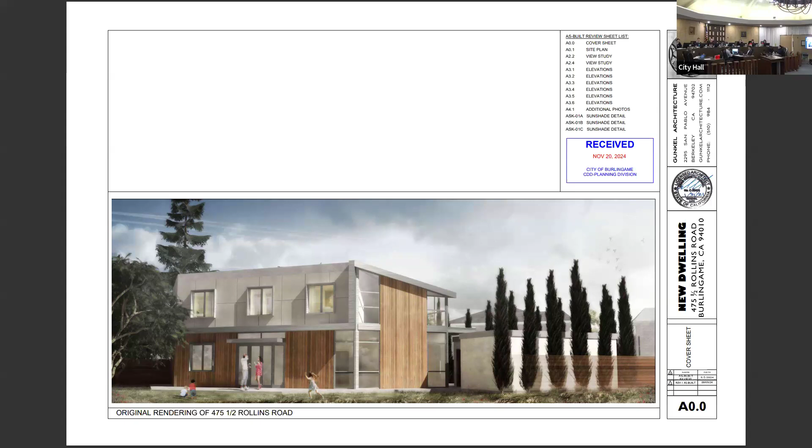Okay, I'm going to open the public hearing. Will the applicant please come forward and state your name and anything else you'd like to add about your project? Yes, my name's Brad Gunkel with Gunkel Architecture. Can you hear me? I'm joining via Zoom. Yes, we hear you.

Okay, perfect. I'm going to share my screen. Or I guess I'm sending... I'm sorry, we don't allow applicants to share screen. Well, I guess you guys all have the presentation, so I'll just kind of walk you through it. I think probably the most important pages start at A3.1.

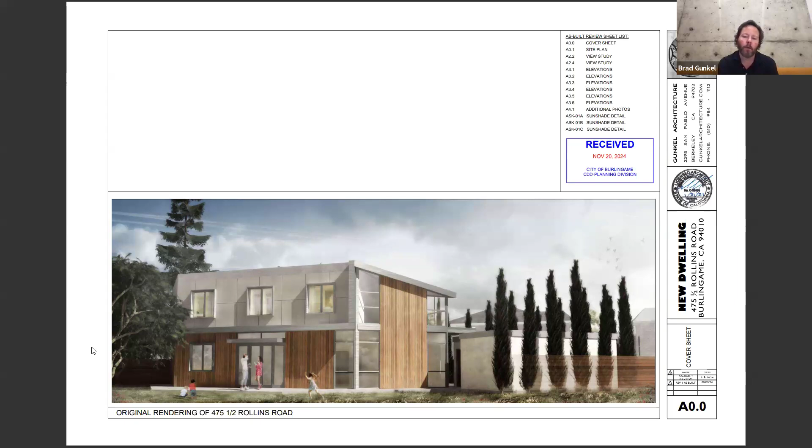So on each one of the A3 pages, we have 4 images. The image on the bottom left is the original approved design. The images above, on the left and right, are basically the as-built condition that you had previously seen—the one on the left being a rendering, and the one on the right being a photograph. Then at the bottom right of each page is the proposed revision to the as-built conditions, in order to

basically comply with the design intent of the original design. So by that, it's not always necessarily exactly the original design. In some cases, it's modifications to the original design, but done in a way that we feel still meets the design intent. So what you can see on A3.1 is that we are adding fins, basically projecting fins around the top 3 windows of the second floor. This is on the southwest elevation, probably the most visible elevation of the house from surrounding yards.

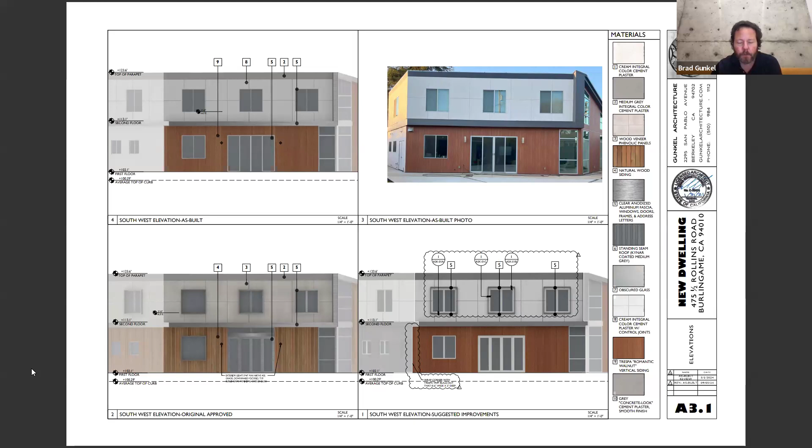Well, I think on A3.2, you can see the same condition happening on the ground floor on the bottom right image as well. And there again, we're wrapping that Trespa around 6 inches and having it project out 2 inches. Then on A3.3, the elevations are completely in compliance with the original approved design. And A3.4, I think you're going to see—

this is where the building—the house was built without the Trespa or faux wood siding on a couple of the elevations, and the doors and windows were white instead of gray. So what we're proposing is actually putting another coat of the integral color cement plaster over the white cement plaster on the lower level. This would be a gray integral color cement plaster to provide a sort of concrete look.

We feel that, combined with painting all of the white doors and windows metallic gray, and then continuing that Trespa around so that you actually see the profile of the wall projecting to terminate the cementitious plaster, will create a nice finish appearance that I think you guys were looking for. It wasn't necessarily reflected in what had been built.

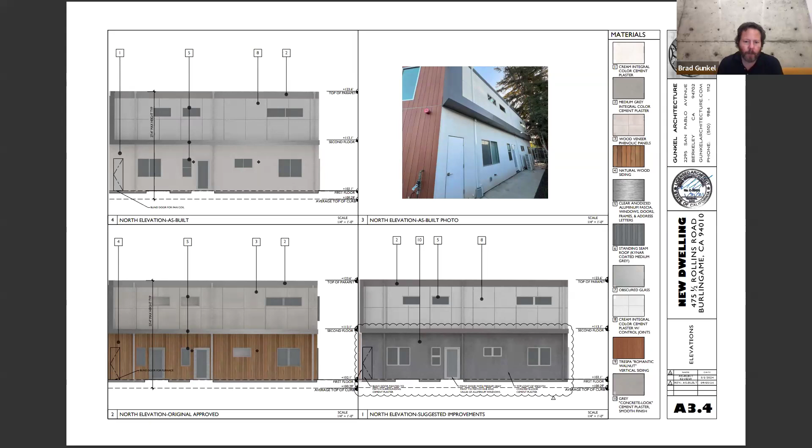And so again, on A3.5, I think the best way to compare this would be to look at image 3 as the as-built condition, and image 1 below that as what we're proposing—so you can see the difference between the two. We are proposing the fins on the 3 southwest windows on the top floor, not the window on the northwest elevation, as that window is mostly covered by trees and pretty much invisible to the neighbors.

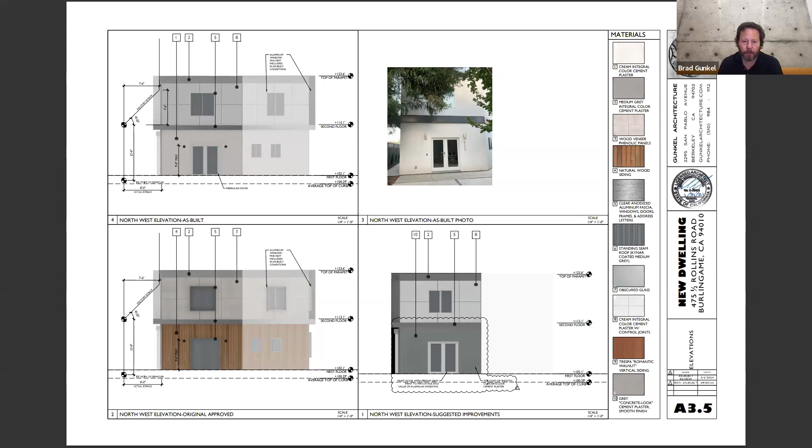We thought it would be wasted to put the trim there, and also that the trim would just end up collecting debris from the adjacent redwood tree. A3.6 shows how we're wrapping that trespa on the lower level, having it project out so it becomes a termination point for the cementitious plaster, using a natural gray cementitious plaster that creates a concrete look on that lower level.

The last three images are the details for the projecting fin around those three upper floor southwest windows, creating a fin offset from the window by 2 inches that provides visible stucco between it and the trim on top and sides. On the bottom, we believe you won't be able to see the flange attached above the trim, similar to the top.

I think that's reflected in the elevations you'd previously seen. So that all said, if anyone has any questions, I'm happy to answer them. Thank you for your time.

Thank you very much. Any questions for the applicant?

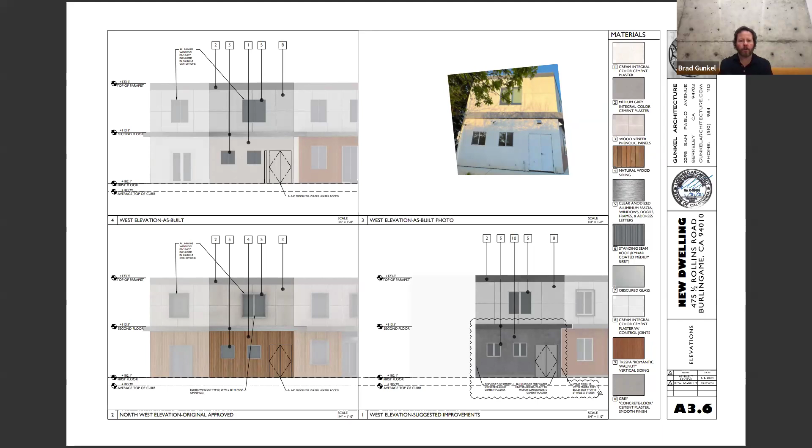Okay, thank you. Do we have any other questions for the applicant? Do we have any members of the public attending in person who wish to speak on this item, or did we receive any public comment emails? No public comment emails.

Then I'm going to close the public hearing. Commissioners, do we have any comments or motions?

Yeah, when this came before us originally we spent a lot of time talking about it, so I think the changes made reflect the minutes we had from that meeting. I do like the fins, they add a little bit of depth on the second floor. I understand maybe the maintenance issue on that side window - I was going to say why not add that fourth window, but I don't think it's visible, and if it's a maintenance issue it's not critical for me. I think the smooth stucco in a concrete color probably solves the ground floor issue we had. So I'm okay with the changes as proposed.

I'm in agreement with Commissioner Horan and feel the changes were a good add. I appreciate the team taking the extra steps to push that through, and I think it'll make a better product.

Commissioner Pfaff? Oh, I was just going to answer Commissioner Pfaff's question. Just scaling the fins off the drawings, they look like they're about 4 inches originally proposed. Okay, yeah, thank you, I appreciate that scale.

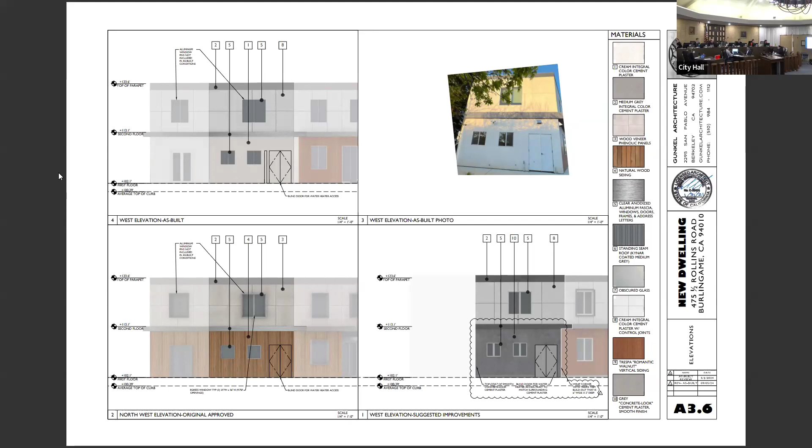Commissioner Comaroto, aye. Commissioner Pfaff, aye. Commissioner Schmid, aye. Commissioner Shores, aye. Commissioner Tse, aye. Vice Chair Horan, aye. And Chair Lowenthal, aye. The motion passes.

Moving on to item 9B, 1317 Paloma Avenue.

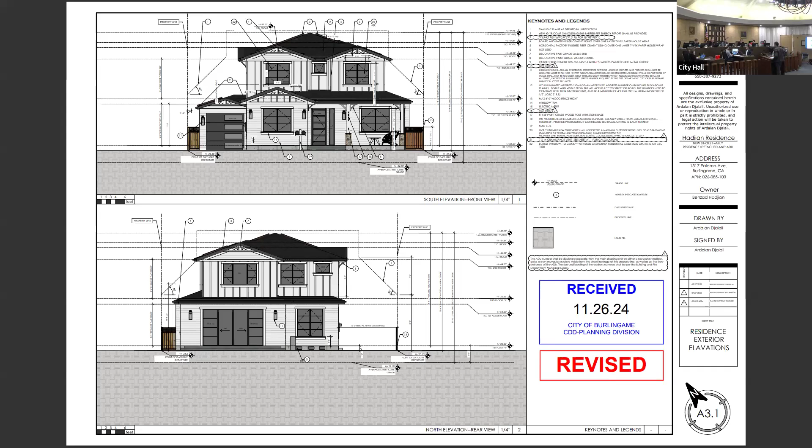Regarding the decorative window shutter, we decided to eliminate those from the facade because it can bring more harmony to the design and more balance. And the last change will be removing the light stone from the false chimney on the side yard, so there is no clear view from the street to the side yard and also the false chimney from the lower roof. The appearance will not be good from the inside of the house.

So this is pretty much it for the recent changes. If you have any questions, I will be happy to answer those. And one more thing, there is still a request from the clients: if we can remove the decorative trusses from the front of the garage and also from the rear elevation, and keep the rest of those. Thank you.

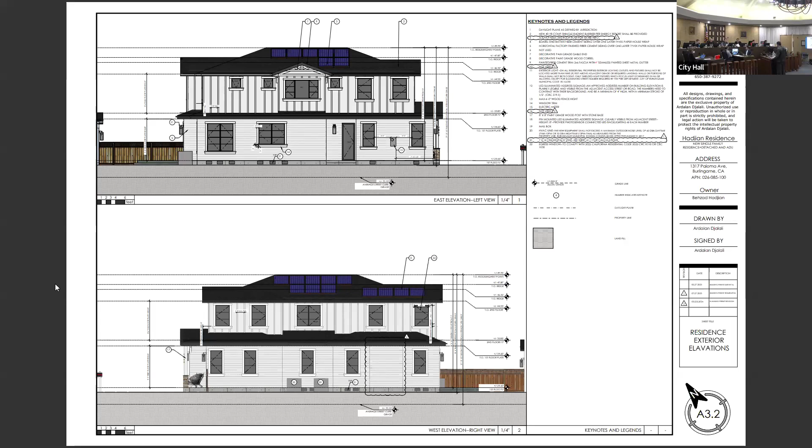Do we have any questions for the applicant? Commissioner Tse?

You were just saying removing the truss at the front of the garage, under the gable there, and then at the rear elevation, above the master bedroom. I'm trying to recall correctly, last time I was visiting there, was there something in the area of under that gable end at the garage that's preventing you from adding that truss?

Because of the complexity of the work, there is some cable work for the camera, and the client asked if we can remove that.

Well, yeah, that's what I seem to recall, that there was a camera there or something. Right in the middle? I can't remember if it was right in the middle or on the side. Was it right in the middle? Yes, in the middle. Okay, thank you.

Any other questions for the applicant? So just to be clear, what is on the screen here is what they are proposing, but they've asked to remove the garage truss. Sure, yeah. Otherwise you can keep those up.

Do we have any members of the public attending in person who wish to speak on this item, or did we receive any public comment emails? No public comment emails. All right, thank you very much. I'm going to close the public hearing.

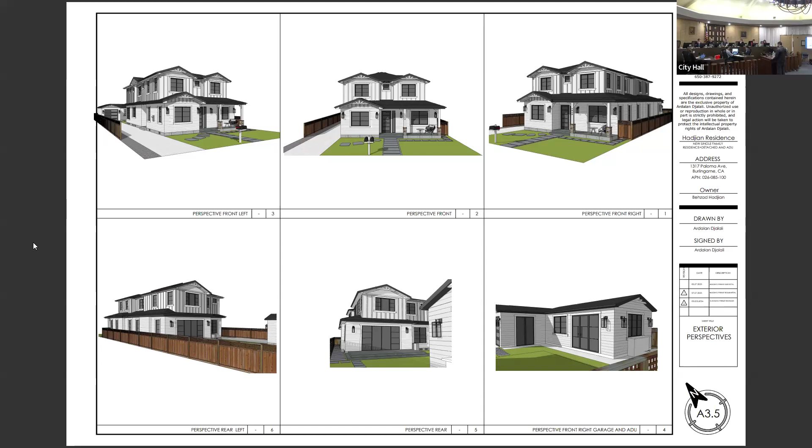Commissioners, do we have any comments or motions? Again, I think we discussed this project at length. I appreciate that this is where we landed. I'm okay with removing the truss from the garage and the rear elevation. I'm okay with the changes as proposed. I'm also okay with them mentioning removing the shutters, which had been discussed before. I'm also okay with those.

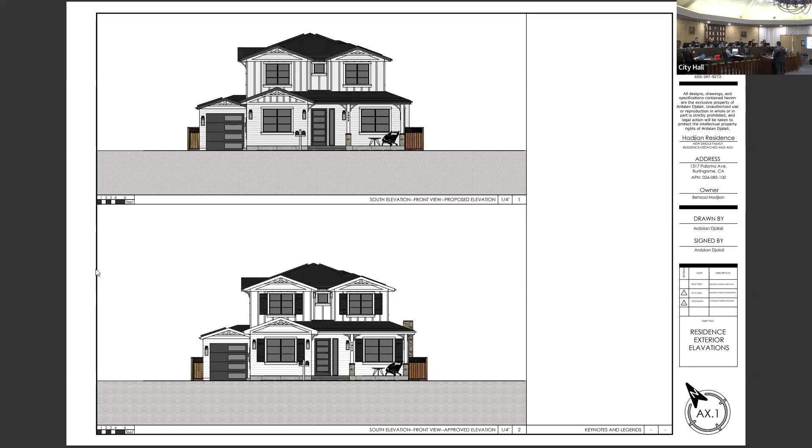Agreed. Anybody else? I'm good. I can move that we approve this project as revised per the staff report, less the trusses on the front of the garage and the rear elevation. I'll second that. Great, we have a motion by Commissioner Tse, seconded by Commissioner Horan.

Any discussion? We have a roll call vote, please. Commissioner Pfaff, aye. Commissioner Schmid, aye. Commissioner Shores, aye. Commissioner Tse, aye. Vice Chair Horan, aye. And Chair Lowenthal, aye. That motion passed 6-0-0-1.

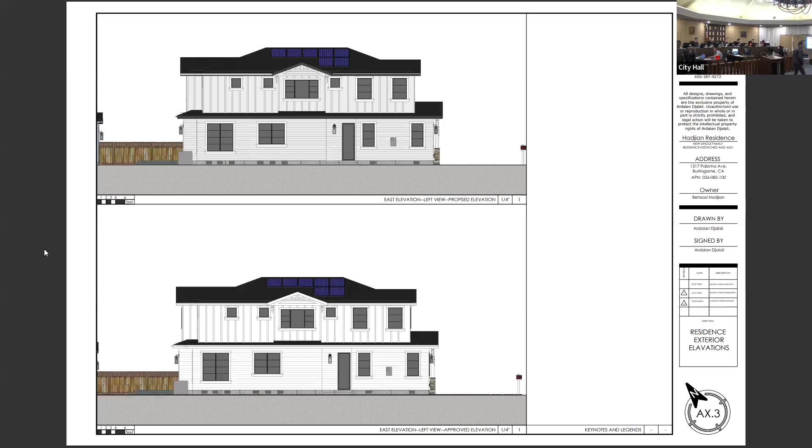An action by the Planning Commission is appealable to the City Council within 10 days of the Planning Commission's action. If the action has not been appealed or called up for review by the City Council by 5 p.m. on the 10th day, the action becomes final. In order to be effective, appeals must be in writing and must be accompanied by an appeal fee of $900, which includes noticing costs. Congratulations.

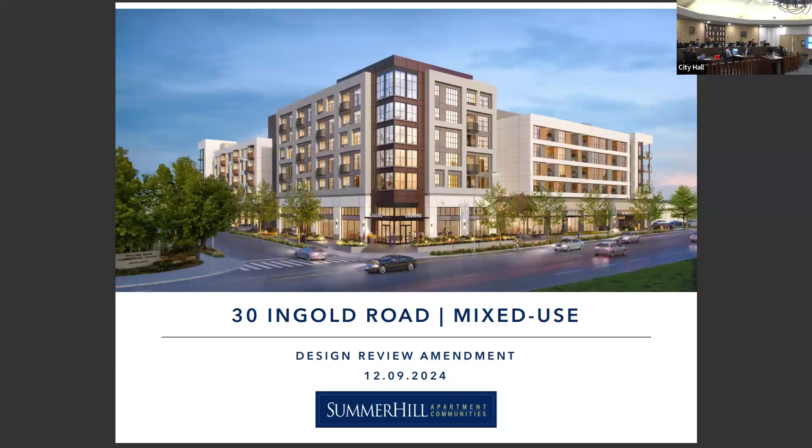Can we hear a staff report, please? Yes, this is an application for an amendment to design review for changes to a previously approved mixed-use residential development project at 30 Ingold Road, zoned RRMU. The proposed project includes increasing the number of residential units from 302 to 320 units. This project was originally approved by the Planning Commission in October of 2020 and included 298 units. In July of 2023, there was an amendment granted by the Planning Commission that increased the number of residential units from 298 to 302 units. This also included 2 below market rate units. So at the time, 2 market rate units were added and 2 below market rate units were added. That increased the below market rate units from 43 to 45, at a low income category.

With this application before you this evening, the applicant is requesting a second amendment to add additional units, a total of 18 units, which would increase the total number of units on the project from 302 to 320 units. Staff would note that the number of low-income units would also be increasing from 45 to 50 low-income units with this application.

A supplemental environmental analysis was prepared to assess the potential for changes in environmental impacts from the proposed addition of units. It concluded that the project would not change the conclusions presented in the Class 32 categorical exemption originally prepared for the project, so the modified project still qualifies for the exemption under CEQA.

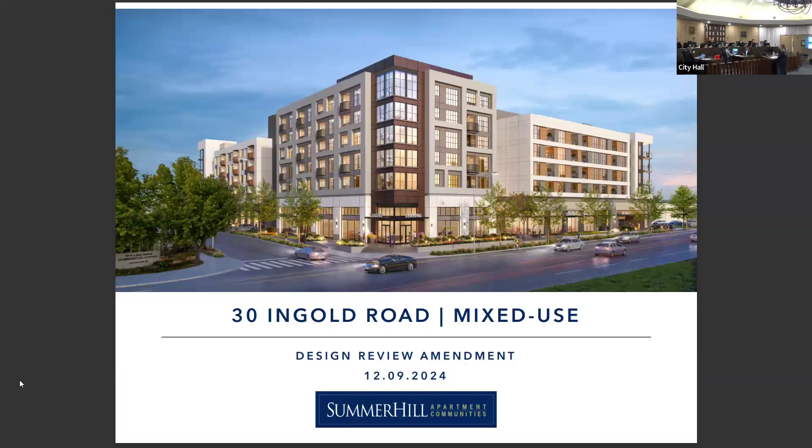Great, thank you. I'm Brenna with BDE Architecture, and this evening I'm going to be walking through some of the revisions that Richard mentioned in his introduction. So if we can go to the next slide, please. On this first slide, you'll see the project statistics.

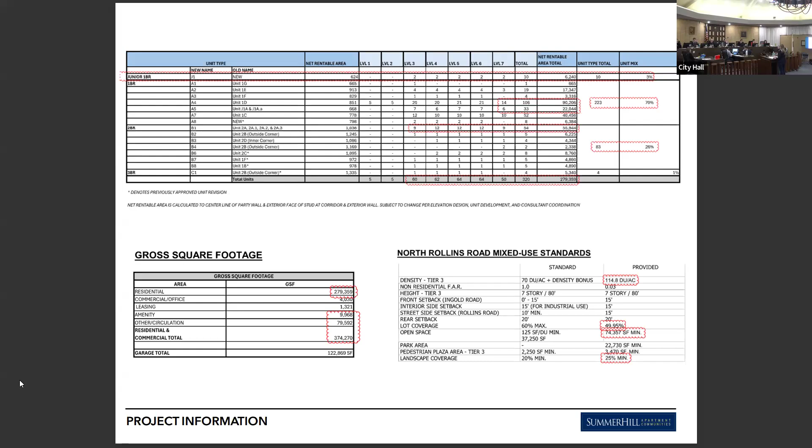All revisions are shown bubbled in red. If we go to the next slide, please, you can see that we increased the parking and bike parking count to accommodate the increased number of units, so we're now parking at 380 stalls, up from the previous 358 stalls.

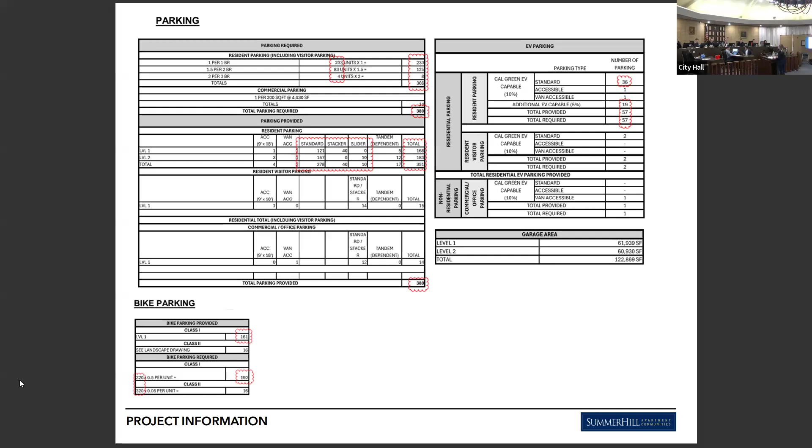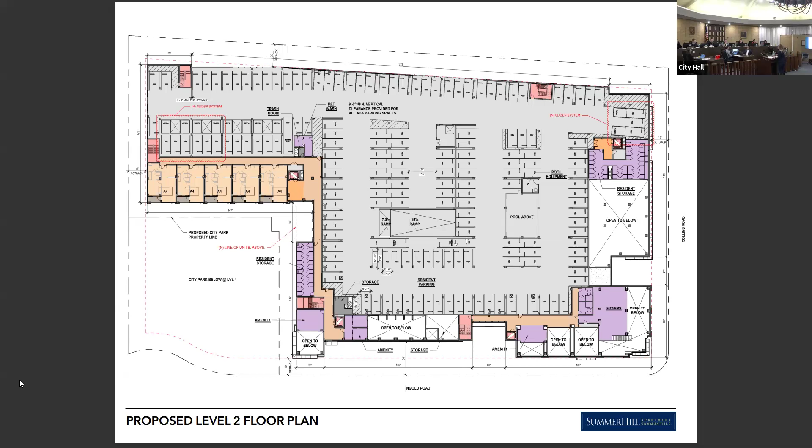On the next floor, you'll see that there are 2 areas, one on the left and one on the right, where we had tandem parking previously, and we've introduced a pallet slider parking system in lieu of the tandem parking. If we can go to the next slide, please, this is our typical residential floor plan.

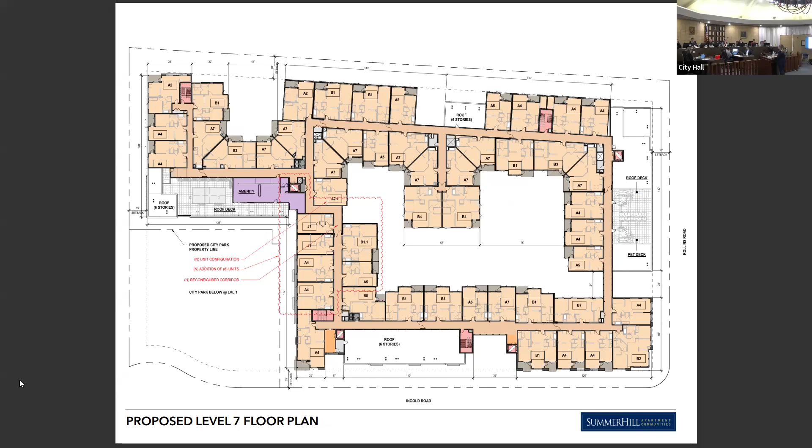And there used to be a low roof at this location, and that's been modified to livable space. So that's how we got those extra 3 units on this floor.

And on this page, on the top is the north elevation that also did not have any revisions to it. But of course, the...

...elevation that faced west towards the park, we had some revisions because we have now infilled that gap and filled it with units. So on the right side of that lower elevation, where you see that 008 called out, the project originally had the design language you see now, which is the gray stucco facade with vinyl windows, and those vinyl windows were accented by the simulated wood siding.

And so we took that language and continued it, and infilled the portion of the building with the new units using that same design language. The portion of the facade with the white stucco and balconies still pops out about a foot or so, and the new portion of the building we added has the gray stucco with the windows accented with wood siding. We feel this design is complementary to the existing contemporary style of the building and incorporates materials that were previously used throughout the project.

And so with that, I'll turn it back over to Richard.

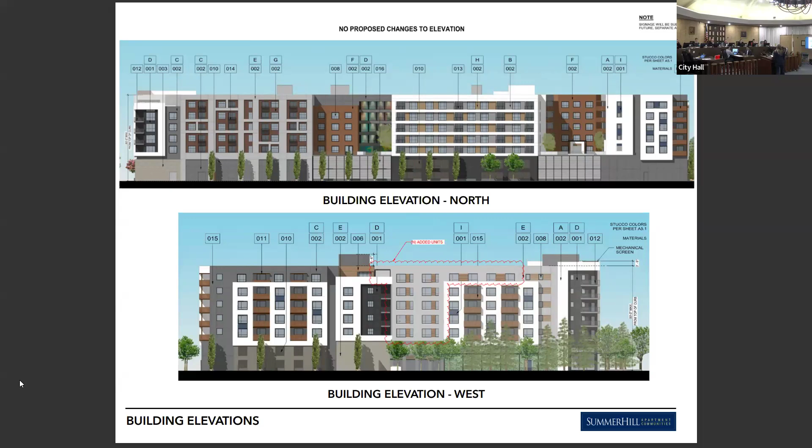Thank you, Brenna. We are very excited to continue working in Burlingame and appreciate staff's thoroughness throughout the process. We have read and accept the conditions of approval and request your approval to the changes Brenna detailed to our project this evening. Thank you for your consideration. We're available to answer any questions you may have.

I just have a curiosity question. On your sliders for parking, is there a backup generator or something? There's something... Typically there's backup power that you can install if necessary, if the power were to go out.

But typically the manufacturers of those stacker systems, which in this case we're leaning towards a manufacturer named Klaus, are able to remedy any of those problems pretty quickly, so it hasn't been an issue on other projects. So no, you will not have a backup then probably. We won't have a permanent generator installed for them. Okay, thank you.

Could you update us on your current schedule for construction? As you all know from visiting the site, we've demoed it and then gotten a pad and then raised it up out of the floodplain. We are currently anticipating starting construction in the spring of 2025, so this coming spring. Thanks.

All right, agenda item number 10, design review study items. First one up, 10A, 1519 Bernal Avenue.

Were any commissioners not able to visit this project site, or do any commissioners wish to note any ex parte communication regarding this project? Seeing none and no recusals, let the record note that all commissioners present have visited the project site.

Can we hear a staff report, please? Yes, this is an application for design review for a first and second story addition to an existing single unit dwelling at 1519 Bernal Avenue, zoned R1. The subject property currently contains an existing split level single unit dwelling with an attached garage, and the proposed project includes first and second story additions to the house that would increase the floor area from 2,504 square feet to 2,912 square feet, where 3,020 square feet is the maximum allowed.

The existing house contains 3 bedrooms and would increase to 4 bedrooms, which requires 2 off-street parking spaces, one of which must be covered and is provided for in the existing attached garage, and an uncovered space is provided for in the driveway. Staff would note that the project plans before you this evening do include converting 420 square feet of the existing main floor to a JADU, or junior accessory dwelling unit, which is administratively reviewed by staff and not subject to Planning Commission review this evening. So the required design review findings are in your staff report for reference, and that concludes my presentation. Thank you very much. Thank you.

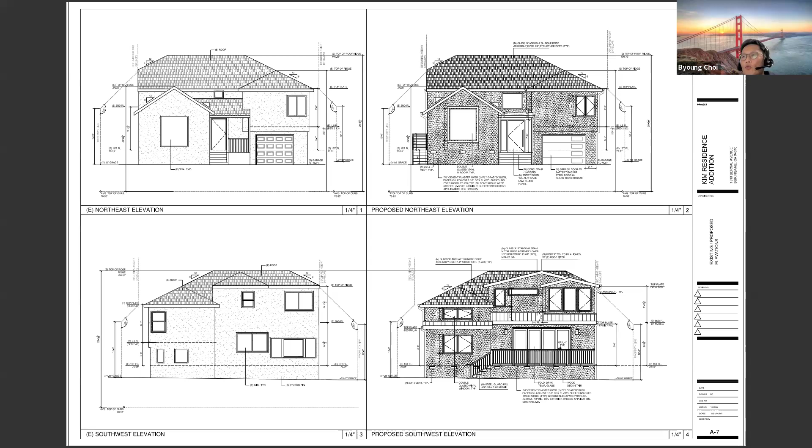So we're using the same opening, but we're trying to make a bay window, and it's not distinguished from the front elevation. I'm sorry, actually I thought it would show, but we missed that. The side elevation was supposed to show that bay window, but we didn't actually show it. That's a good point - we're definitely going to update it. But we do have a bay window. Thank you.

Any other questions? Do we have any members of the public attending in person who wish to speak on this item, or do we receive any public comment emails? There were no public comment emails. All right, I'm going to close the public hearing.

Any comments, Commissioner Pfaff? Yeah, all of the openings look very large, all of them. The door, all the windows, and that's exacerbated by the fact there are no mullions in there. I love that you're reusing the building as much as possible. That's great. I think it needs some work on, at least on that.

I'm just wondering about a design review, but I don't know how that is with the JADU in it. But I think it could really benefit. I think it would be helpful. That's my 2 cents.

I agree. I think that this should go to the design review consultant. None of the windows are working to scale. None of them have any trim. It's flat. The standing seam metal roof doesn't work. It's extending so far out the back like that to create that situation, that's not a good design. The pop out in the front doesn't work. The flat roof over the entry is going to leak.

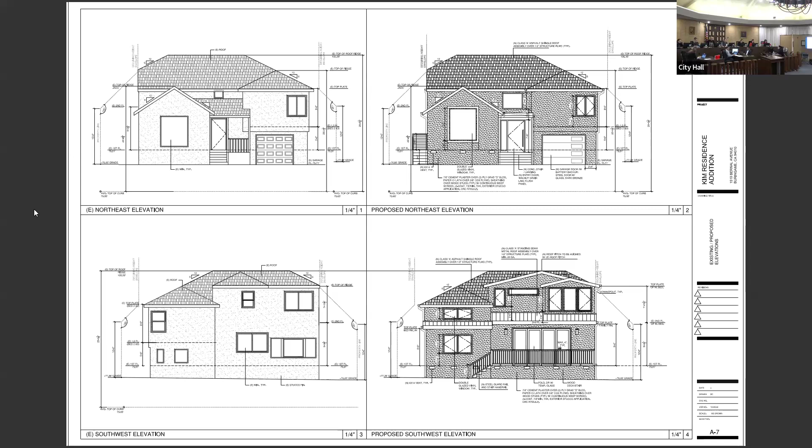All right, moving on to 10B, 2319 Easton Drive. Were any commissioners unable to visit the project site, or do any commissioners wish to note any ex parte communication on the project? I spoke for about 10 seconds with two of the occupants on site. Thank you very much. And no recusals. Let the record note that all commissioners present have visited the project site.

Can we have staff report, please? Yes, thank you. This is an application for design review, front setback variances, special permit for building height and declining height envelope for second and third story additions to an existing two-story single-unit dwelling at 2319 Easton Drive, zoned R1. Subject property has an existing single-unit dwelling with an attached garage, as well as a detached accessory dwelling unit. Easton Creek runs just beyond the rear property line, and the applicant is proposing second-story additions on the left and right sides of the existing dwelling and a third-story addition at the center of the dwelling. The floor area would increase to 5,692 square feet; 5,700 square feet is the maximum allowed.

The applicant is requesting front setback variances for the proposed second and third floor additions. The block average is 20 feet 7 inches, and the proposed second-story addition would have a 17-foot setback on the left side, 20 feet 6 inches at the right side, and the third floor setback would be 20 feet 2 inches. The applicant is also requesting a special permit for the proposed building height, as well as declining height envelope along the right side of the dwelling. The proposed overall height would be 31 feet 2 inches.

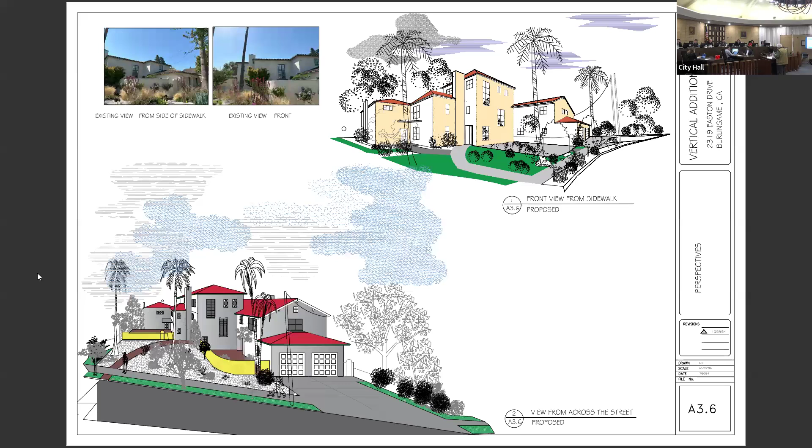I did have one more question regarding the third floor, let me find that elevation. There's one where you show the third story from, I guess, the creek side. What page? It's 3.4. So is that the back side of what we're seeing, oh yeah, I see.

That's the back side, yeah, because that roof—I had a very similar question as my colleague about the roof choice, the gable to gable roof change. From the side it will not be seen, it's only seen from the back. The reason for that is we want to add height in the back of the building; visually it would look better and more stunning than a flat shed roof, per se.

The choice of windows doesn't really emulate any window patterns you already have on the home—they will not change at all. No, I mean the new section. The new section will be exactly as the old one. No, I mean the third floor. Yeah, third floor, the only window we're adding is a big window in the master bedroom, and it will emulate the window below in the dining room and the window in the library, with the exception of the middle portion, which is fixed, providing a better view.

That's all. Oh, that was the one I was asking about. Yeah, thank you. The rest of it has true dividers—it's a true divider wood window, custom window. Thank you.

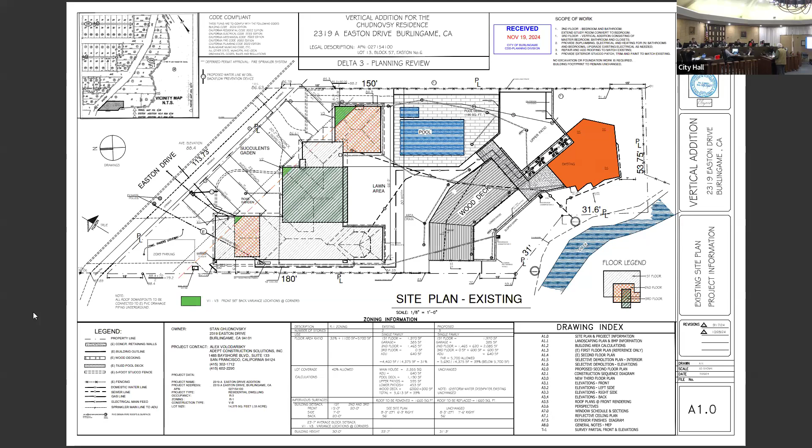I understand wanting to call attention to it more itself, if that's your goal, with using the gable roof. It's a beautiful house, whether it has additions or not. So our goal here, no matter what the project is we're looking at, is that it hangs together. I'm not quite so sure that roof hangs together, but the one on the back, the third story addition, looks like - well, 3 stories is, first of all, very unusual, especially with full, unless it's on a slope lot, which this is slightly sloped, but not like a real slope.

I don't think the windows work with the ones that are already in place, and... Explain, please. Well, our public hearing's actually closed right now, so these are just my comments. I think this could be improved by re-looking at the roofs and also the pattern of the mullions, so they hold together more with the house. So anyway, that's where I'm starting.

Commissioner Tse? Yeah, thank you. Starting off reading the staff report, I was shocked to see all the different requests being made on this property, until I started to dive into the drawings and understand the complexity of the lot, the various and wide-ranging front setbacks along the street, even the varying heights of the structures along the street.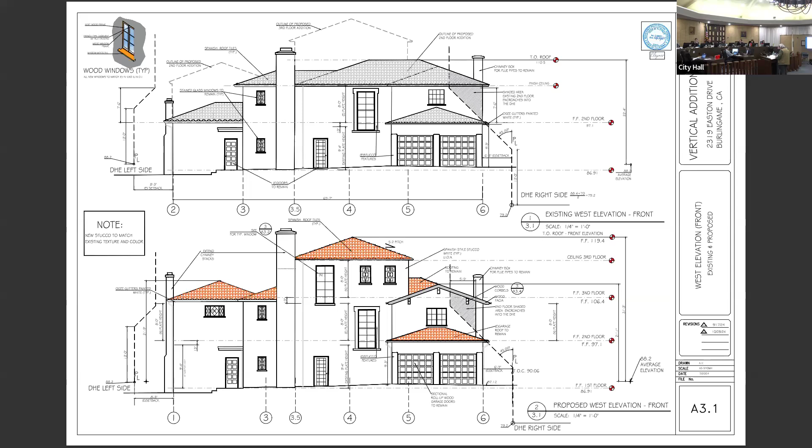I did also want to say that generally I was very impressed with the selection of windows on A7 that are looking to be put in. I'm really happy to see lots of wood true divided light. They look very high quality, and I appreciate the intent to match with the existing windows, like the leaded divided lights, and keep those flows going.

Especially I'm appreciative of the other very large window that faces directly out to the street. It's going to be like the other stairway window they're making for that 3rd staircase. I think that's really nice to see.

Generally I'm also in favor of all of the variances as well for this project. But I'm also happy to see that the demolition is very focused, and there's no intent to touch parts of the house that don't need to be touched. That's just generally nice to see, not an issue one way or the other. That's basically all I have to say.

I'm generally pretty happy with it. I would like to see maybe a different go at continuing with stucco in the gable ends or some other material. That's it.

Yeah, I agree with my fellow commissioner. My personal preference is hip, but especially in the front, it's not a deal breaker for me. I lived in Switzerland for 3 years. The back upper additions look like a Swiss chalet, which is not in keeping with the Spanish style of the house. So I agree that the wood trim just doesn't go with the architectural style. The massing's good. I would have thought I'd be concerned about a third story, but it actually works in this house.

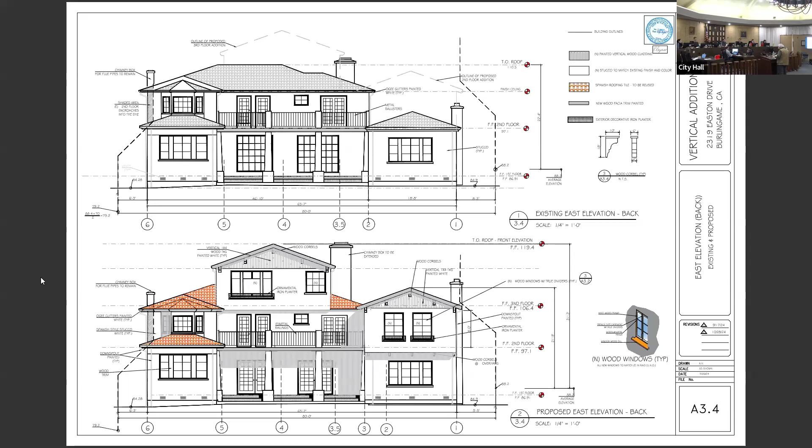So we have a motion by myself, Chair Lowenthal, seconded by Commissioner Schmid. Any other discussion? Can we have a roll call vote, please? Commissioner Comaroto, Aye. Commissioner Pfaff, Aye. Commissioner Schmid, Aye. Commissioner Shores, Aye. Commissioner Tse, Aye. Vice Chair Horan, Aye. and Chair Lowenthal, Aye. The motion passes 7-0-0-0.